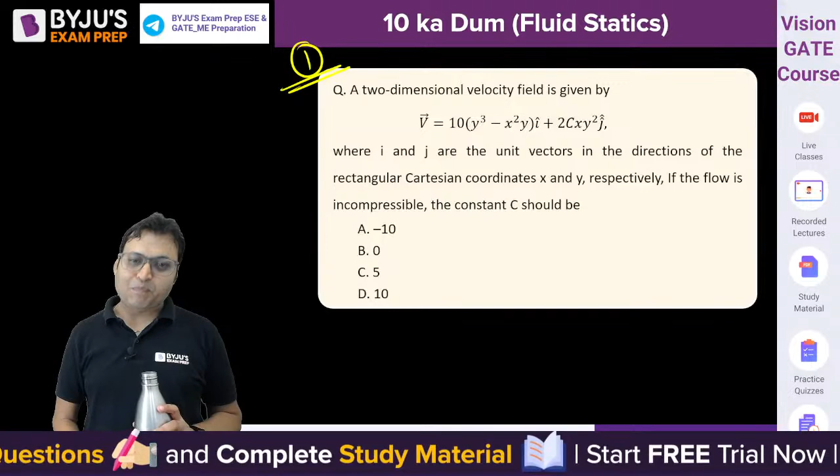Let us start with question number 1. Everyone, please give it a try and let me know the answer. Let me see who will be the first one to give me the correct answer, and I will plan some surprise gift for the one whose performance is consistent and whose time management is perfect.

The question says a two-dimensional velocity field is given by this expression. It is two-dimensional flow, that is why there are i component and j component, where i and j are the unit vectors in the direction of rectangular Cartesian coordinates x and y respectively.

If the flow is incompressible, what we are supposed to find is the value of the constant. What we need to do is apply the continuity equation for incompressible flow.

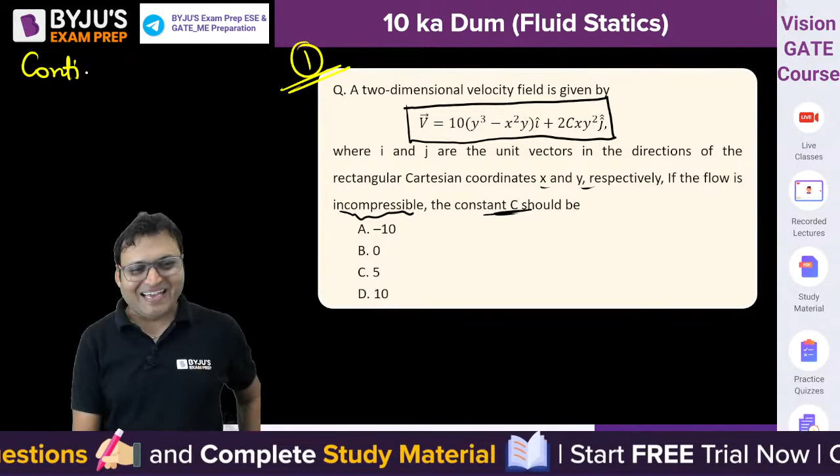Do you guys remember? Yes, Ludwig Prandtl. Oh my God, Prandtl is also there. Ludwig Prandtl is famous for... can you tell me? What has he done in engineering?

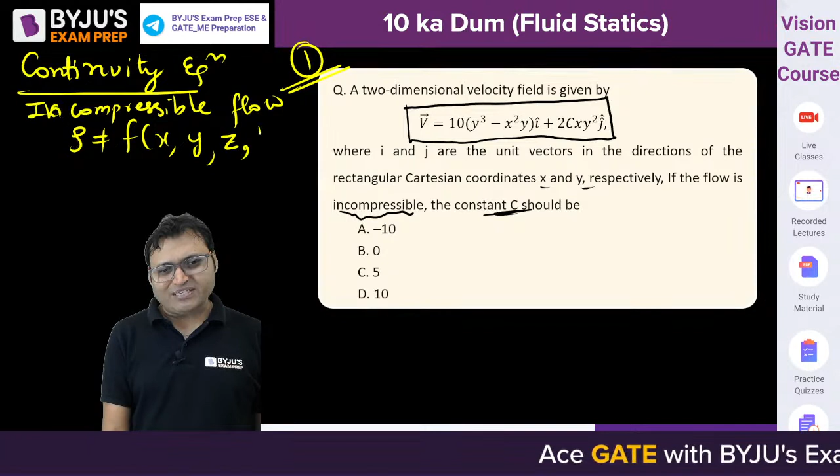If we apply the continuity equation for incompressible flow, what is the meaning of incompressible flow? Density is neither a function of x, nor y, nor z, nor time. Density remains constant throughout the flow. So first of all, you need to equate this expression with the general velocity profile so you can get u and v.

We can get u and v. Thanks for your love and affection. Let me know - theory of boundary layer. Well done, yes, C is the right answer. Ludwig had given the correct answer first, so the prize for this question goes to Prandtl.

Manike, you were a bit late. Yes, definitely the correct answer is option C. Let me quickly solve it for those who were not able to solve it.

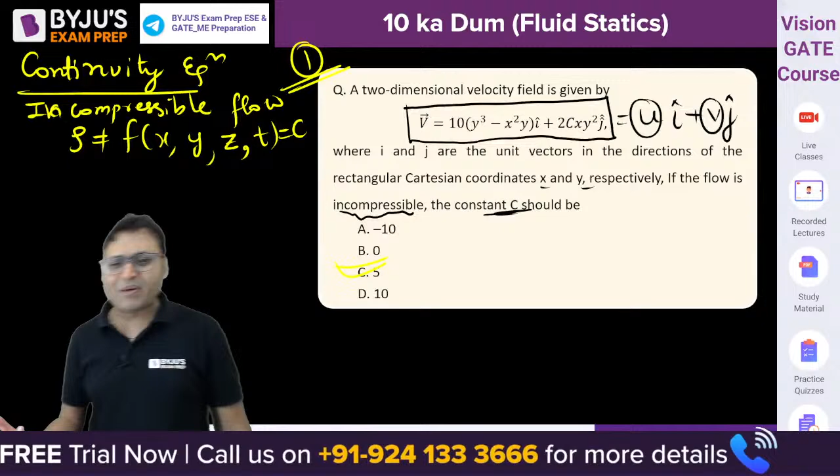So u is equal to the parameter related with i cap, so u is equal to 10y cube minus x square y. And what is velocity in the y direction? That is 2cxy square. So what is the continuity equation for two-dimensional incompressible flow in the Cartesian coordinate system?

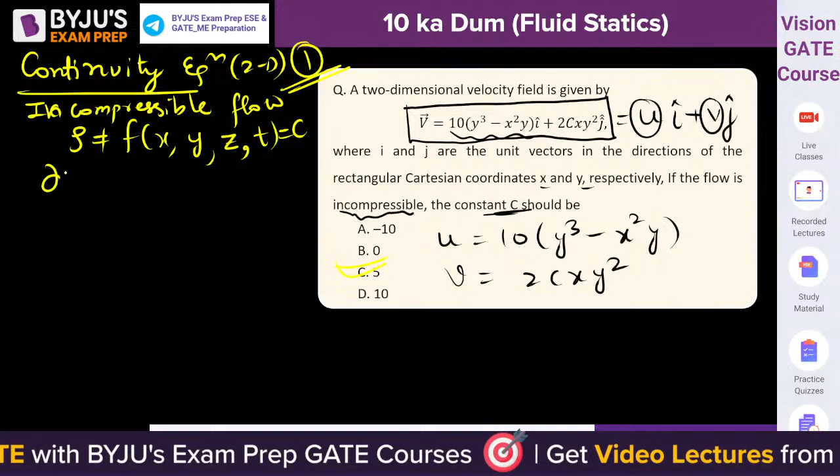We can say del u by del x plus del v by del y is equal to 0. What is del u by del x? If you differentiate u with respect to x, then it will be 10 minus 2x into y. Plus, what is del v by del y? Del v by del y is 2cx into 2y, which must be equal to 0.

So it will be minus 20xy plus 4cxy is equal to 0, or we can say 4cxy is equal to 20xy. Y gets cancelled out, x also gets cancelled out, then c is equal to 20 by 4, that is equal to 5. So 5 will be the correct answer. Well done guys, well done.

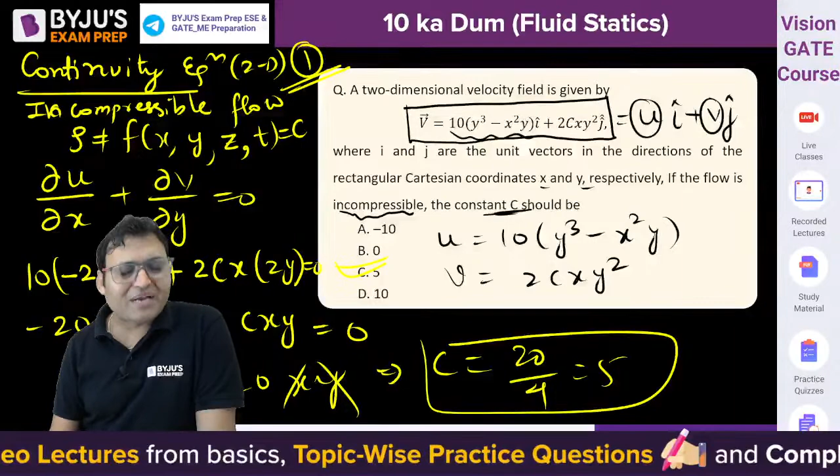Those who were not able to solve it, I hope you understood the concept. The continuity equation for incompressible flow is a very important expression; directly or indirectly, questions are framed around it. Sometimes they ask you to check whether a particular flow is compressible or incompressible. There are two methods to know this: if the density varies with space or time or both, then it is definitely compressible flow, but if the density does not vary with space and time, then the flow will be incompressible.

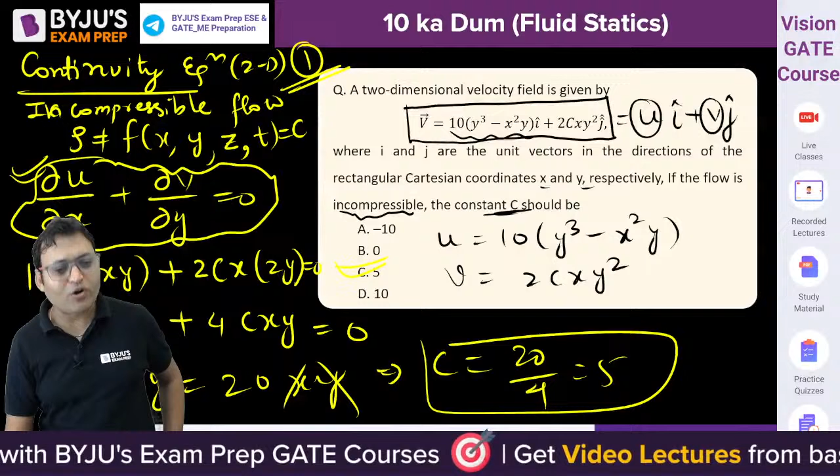If nothing is given regarding density in the question, we need to check the continuity equation for incompressible flow. This is satisfied because the continuity equation represents mass conservation, and for a flow to be possible, mass conservation should always be satisfied. If the continuity equation for incompressible flow is satisfied, the flow is definitely incompressible.

If it is not getting satisfied, then the flow is said to be compressible. All right, let us move to the next question. This is question number 2. I could not type this equation, so I have brought the direct screenshot of the question.

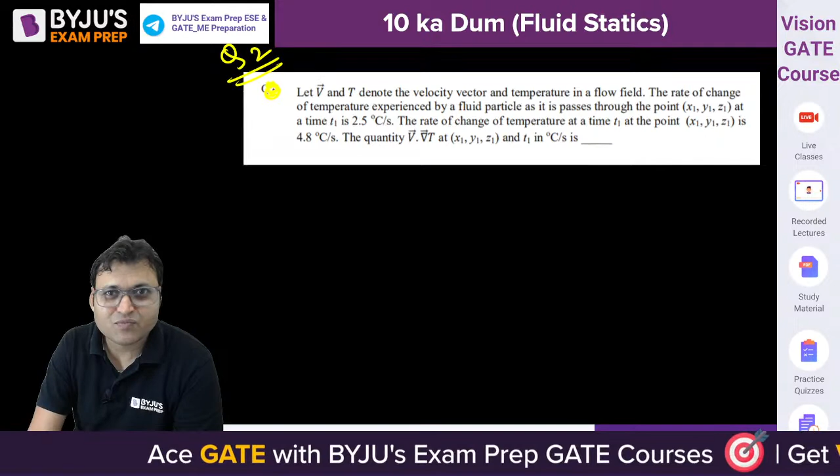One point for the right guess. So wherever you find an option to practice, do not skip that. Always try to keep practicing. The more you practice, even if you are not very comfortable with the theory concept, once you start practicing numericals based on a particular concept, you will automatically start enjoying it and developing confidence in that concept. GATE is all about the application of the concept that comes from the theory.

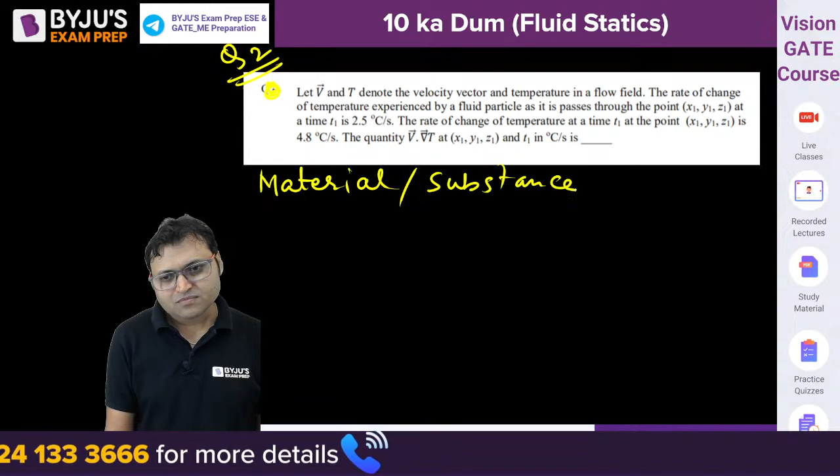Yes, that is correct, Prantal. The question is from the material or substance derivative, also called total derivative.

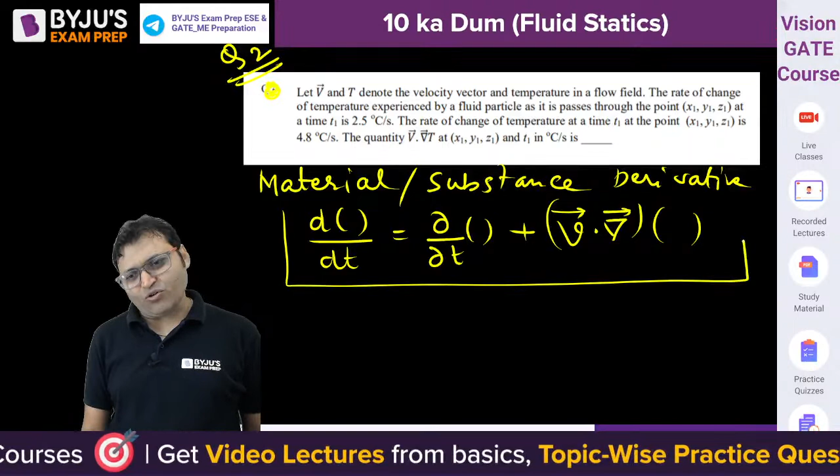The total derivative of any parameter, d by dt, is equal to the partial derivative of that parameter plus V dot del into that parameter. This is called the total derivative of a parameter, or we can call it material derivative. So if we find the material derivative of velocity, that gives the acceleration.

Similarly, we can find the material derivative of temperature, where small t is time and capital T is temperature. We can also find the material derivative of pressure. If we simplify this, we get dT by dt equals del T by del t, the partial derivative, which is called the local or unsteady part, plus V dot del into T, which is called the convective or advective part. Here velocity and temperature are denoted as V and T.

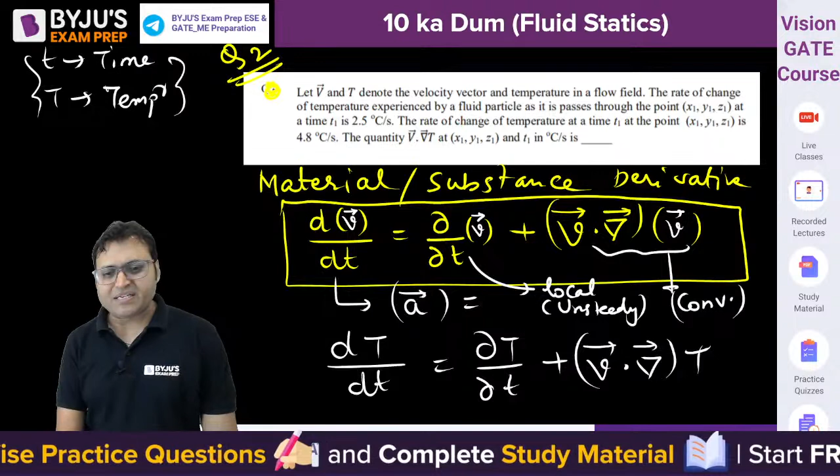So the total derivative, the rate of change of temperature experienced by the fluid particle as it passes through the point, is given as 2.5 degrees Celsius per second. So dT by dt equals 2.5 degrees Celsius per second. The rate of change of temperature at time t1 at point x1, y1, z1, that is the partial derivative of T, is 4.8 degrees Celsius per second.

So if we simplify this, putting these values in: the total derivative 2.5 is equal to the partial derivative 4.8 plus V dot del into T. So V dot del into T equals 2.5 minus 4.8, which gives minus 2.3 degrees Celsius per second.

Minus 2.3 will be the correct answer. Prantal, well done. Maniket, what about others? It should be minus 2.3 degrees Celsius per second. Is this clear to everyone?

Yes Prandtl, yes, this equation is valid for both. Shall we proceed to the next question? This is how you can find out the expression of acceleration.

dT by dt is equal to del T by del t plus, can I say, u into del by del x plus v into del by del y plus w into del by del z multiplied by T. So can I say, if we take T inside the bracket, then it will be u into del T by del x, del T by del y, del T by del z. This is the expression for total derivative of temperature with time.

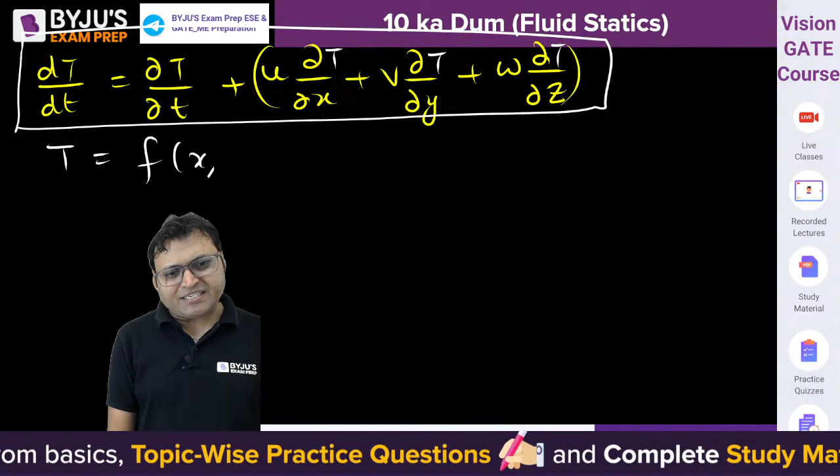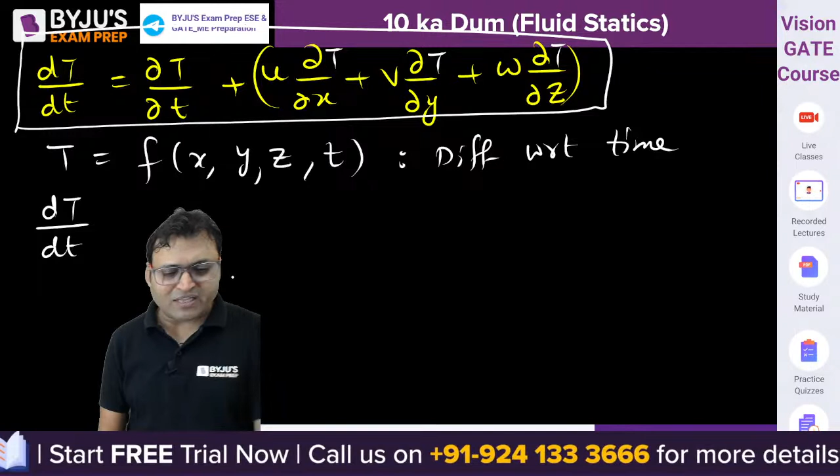That expression can be obtained like this also. As temperature is a function of x, y, z and t, if we differentiate this with respect to time, left hand side is a single parameter, so total derivative with time is on the left hand side. What is the right hand side?

We can say del t by del x into dx by dt plus del t by del y, partial derivative, into dy by dt plus del t by del z into dz by dt plus del t by del t into dt by dt, isn't it?

This will be the expression. Do you get it? And what is dx by dt? That is u. And what is dy by dt? That is v. dz by dt is w, dt dt getting cancelled out. So dt by dt is equal to, that is another way of getting the same expression.

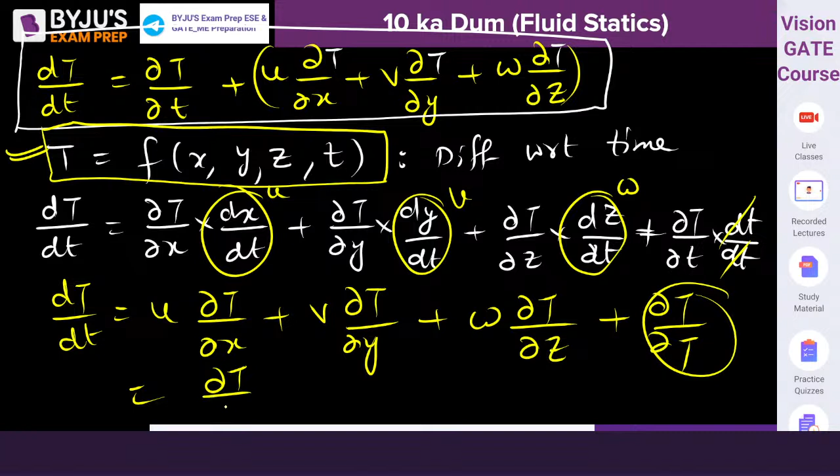So u into del t by del x plus v into del t by del y. If you do not remember the material derivative, then also you can develop the expression by assuming that temperature is a function of space as well as time, isn't it? Plus w into del t by del z plus del t by del t. So that is nothing but del t by del t can be written here, del t by del t, plus

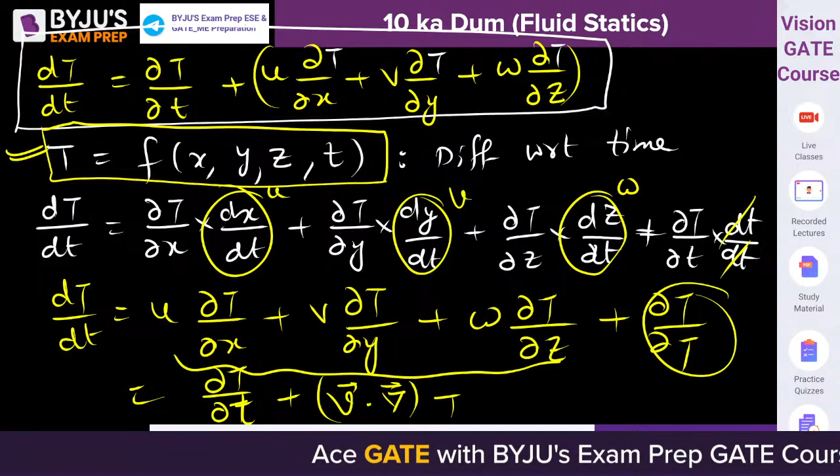this is nothing but v dot del into temperature, isn't it? So that is another way. That is how it is related.

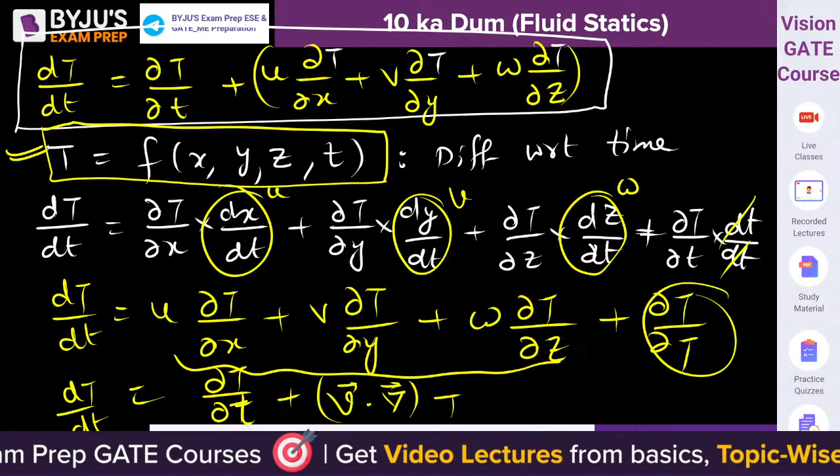Let us move to the next one, question number 3. Shall we proceed to question number 3? This is your question number 3. Everyone, please give it a try. And if you are not able to solve it here, then try the question at home again.

Yes, give it a try and let me know the answer. Ludwig is every time giving me the correct answer.

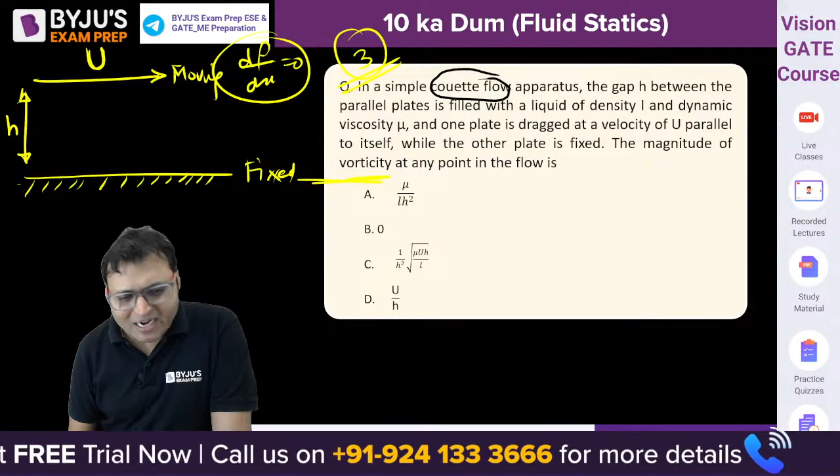The magnitude of vorticity at a point in the flow is. Can you let me know the velocity profile? If we assume it as plane Couette flow, can you let me know the velocity profile? The options are: option A is mu upon rho H square, option B is 0, option C and option D is U by H.

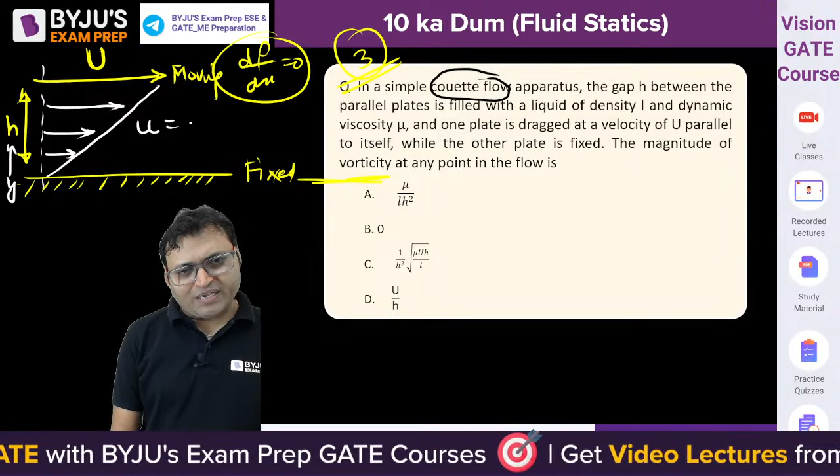Can we assume the velocity profile to be linear? If nothing is given regarding the velocity profile in the fluid, can we say small u, this is y, so u is equal to capital U into y by h. Can we assume the velocity profile to be linear? U is equal to capital U y by h, isn't it? Now what is the vorticity about the z axis? Nobody has given me the answer yet. No one has given me the correct answer yet.

Prantal, कुछ confusion है? So it is a function of y. Can we say u is not a function of x? It is not a function of x, but yes, it varies in y. U is equal to 0 at y is equal to 0. At y is equal to h, U is equal to capital U.

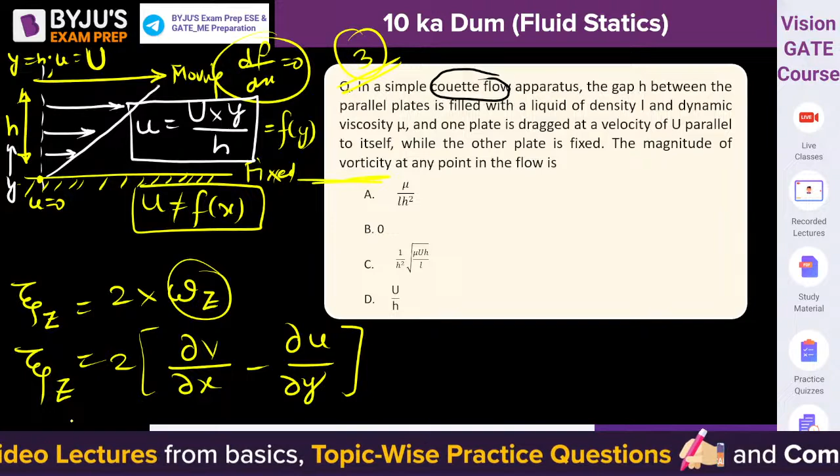It is linearly varying. So vorticity about the z axis is twice of omega about the z axis. And what is omega z? Twice of omega z is del v by del x minus del u by del y. So it will be del v, then del u. That is the vorticity about the z axis. So can we say v is the velocity in the y direction? V is equal to 0.

Velocity in the y direction will be 0, but velocity in the x direction is a function of y. It is only velocity in the x direction. There is no velocity normal to the x direction. So del v by del x will be 0 because v is equal to 0. So del v by del x is equal to 2 into, what is minus del u by del y? Del u by del y is U by h. So minus capital U by h, isn't it?

Sorry, twice of angular velocity, and angular velocity will be, what is angular velocity? Angular velocity is half of del v by del x minus del u by del y. So it is half of 2 into 1 by 2 into minus U by h. So minus U by h will be the value of vorticity about the z axis.

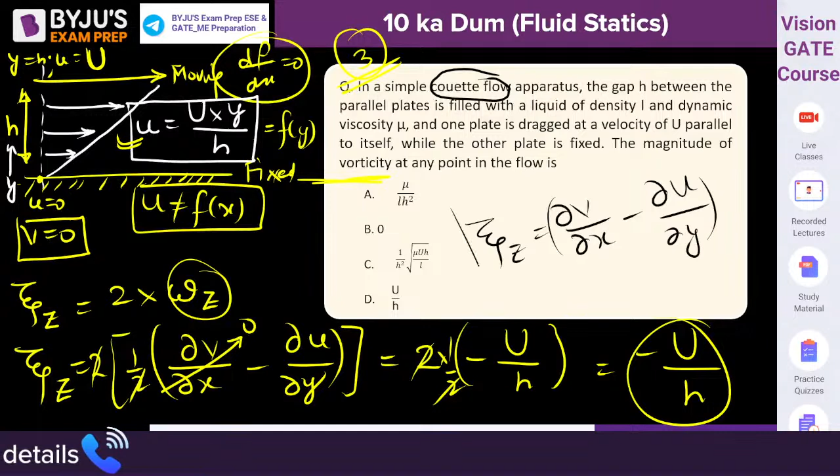Is this all clear? Question number 3. Anybody having any doubt? Do let me know.

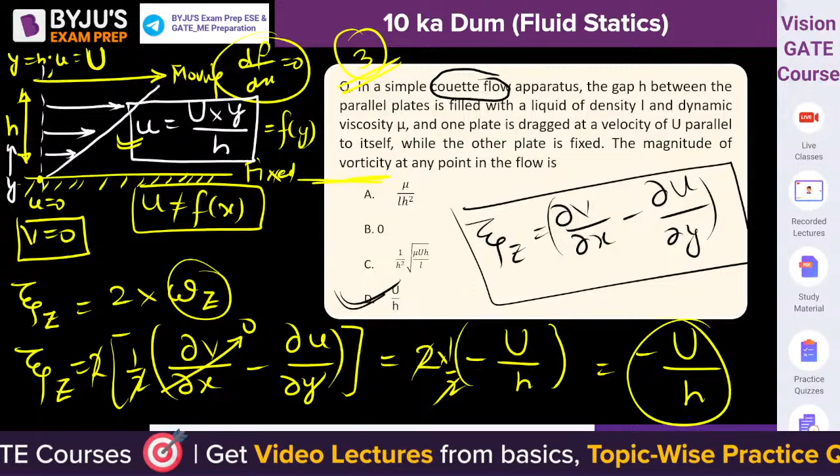Let us move to the next question. Before moving to the next question, let me give you an important information. This is already over, the 14th, the first mega mock test is already over. Tomorrow,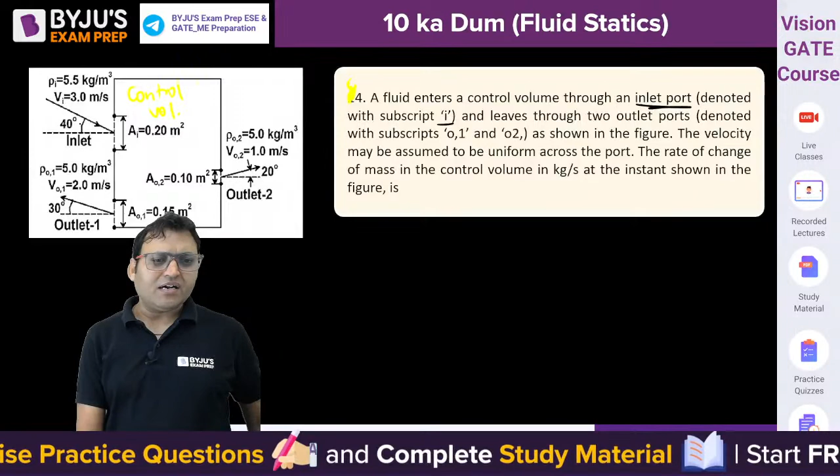So let me help you. If fluid enters into the control volume, this is the control volume. The fluid is entering into the control volume at section, let us say, at the inlet port, which is denoted by subscript I. The fluid is entering at I. The velocity at inlet I is 3 meter per second. The density is 5.5 and the inlet area is equal to 0.2.

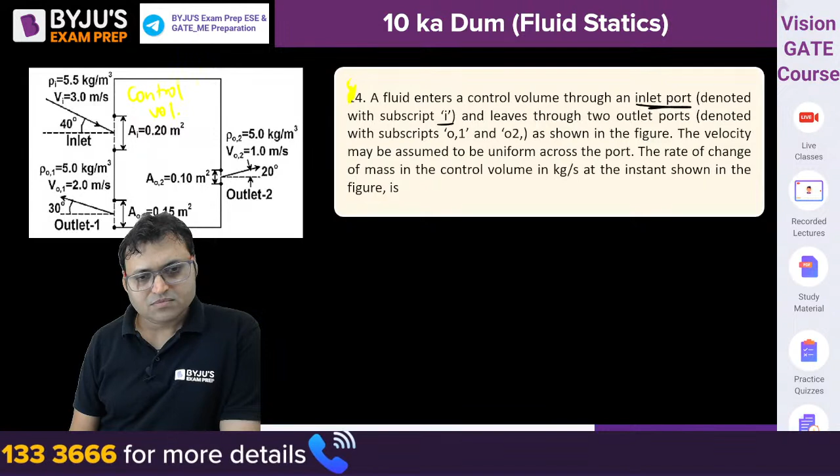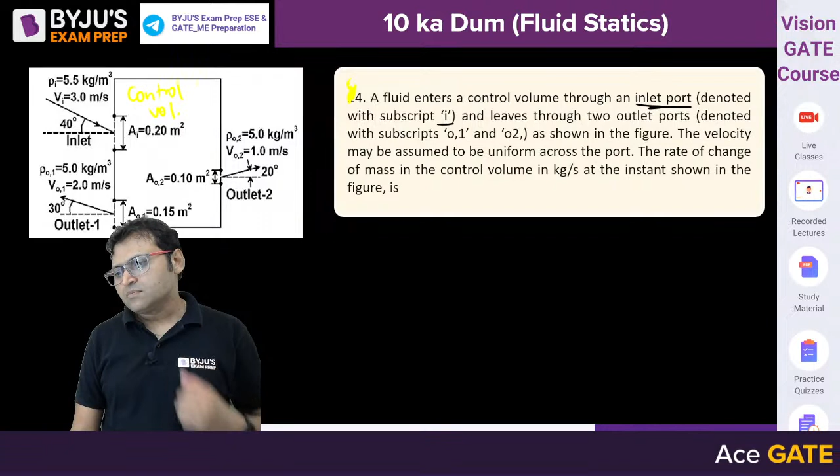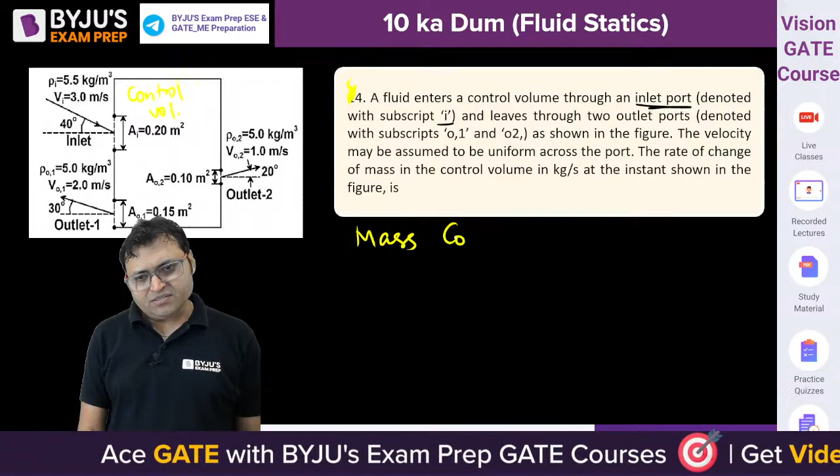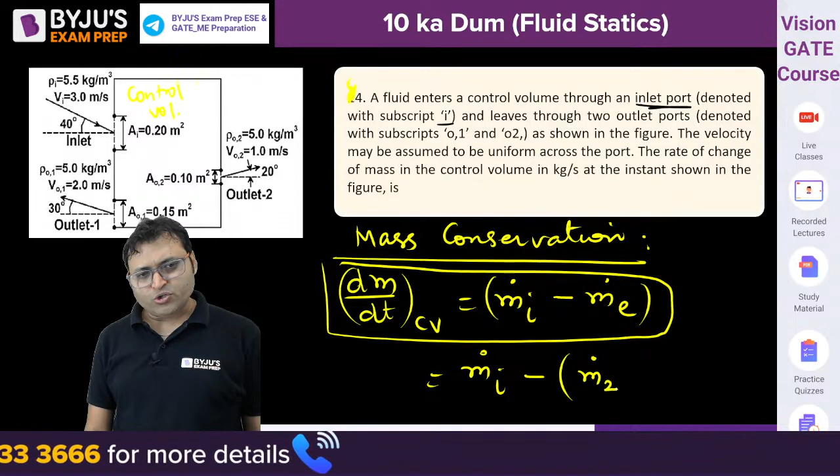So can we say, from the conservation of mass, rate of change of mass in the control volume is equal to mass flow rate entering into the control volume minus mass flow rate leaving from the control volume. That is the rate of change of mass in the control volume. Mass flow rate entering minus mass flow rate leaving, and the leaving ports are O1 and O2. So mass flow rate entering is m dot I at the inlet port, minus m dot 1 plus m dot 2 at outlet. That is dm by dt in the control volume.

So what is the mass flow rate? How to write the mass flow rate? Is mass flow rate a scalar or a vector quantity? It is rho into A into V, or we can call it rho into Q. Mass flow rate is rho into A into V. Will the mass flow rate be a scalar quantity or a vector quantity? Density is given, velocity is given, area is given. Here A into V, or discharge Q equals A into V, and area and velocity must be perpendicular to each other.

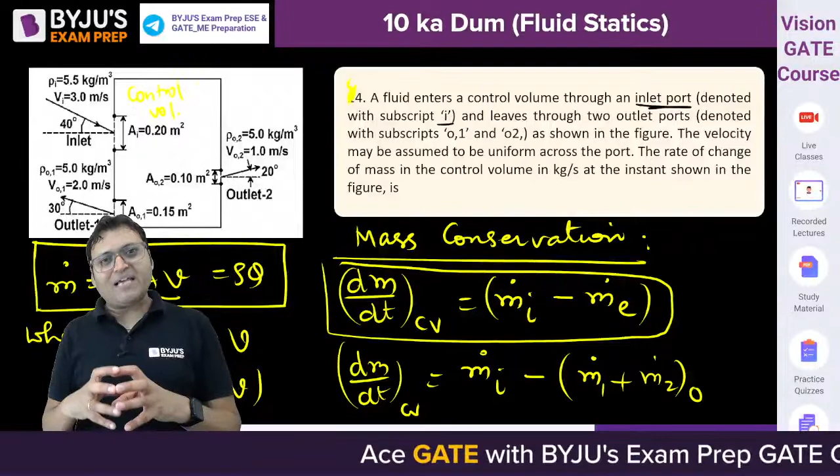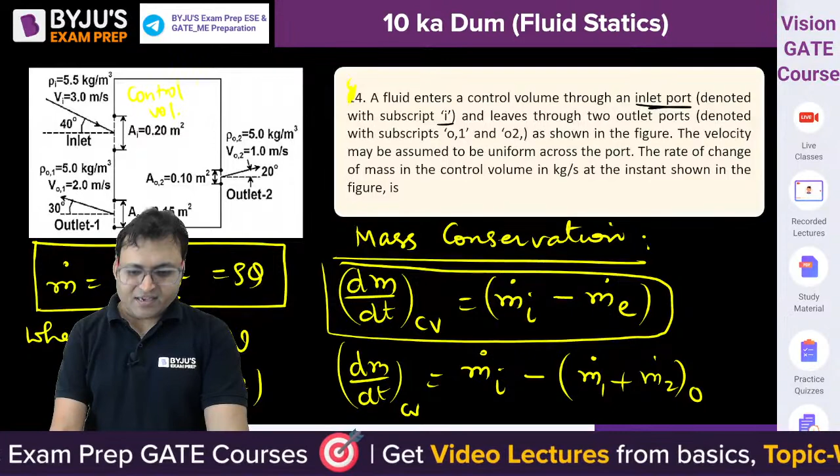So here velocity is having this direction and area is this. If we want velocity and area perpendicular to each other, then vi will be 3 cos 40. Area and velocity must be perpendicular to each other. Mass flow rate is not a vector quantity. Mass flow rate is a scalar quantity, but area and velocity must be perpendicular to each other.

So rho I is 5.5 into area, that is 0.2, into 3 cos 40, that is mass flow rate entering, minus what is the mass flow rate leaving? There are two points where it is leaving. Density is 5 into area is 0.15 into 2 cos 30, plus the third point O2, density is 5 into area will be 0.1 into velocity. Velocity is making an angle of 20 degrees with the area, and area and velocity must be perpendicular to each other, so it will be velocity 1 cos 20.

So this will give you the answer. Can you quickly solve it? 5.5 into 0.2 into 3, 5.5 into 0.2 into 3, 5.5 into 0.2 into 3 into 3 cos 40,

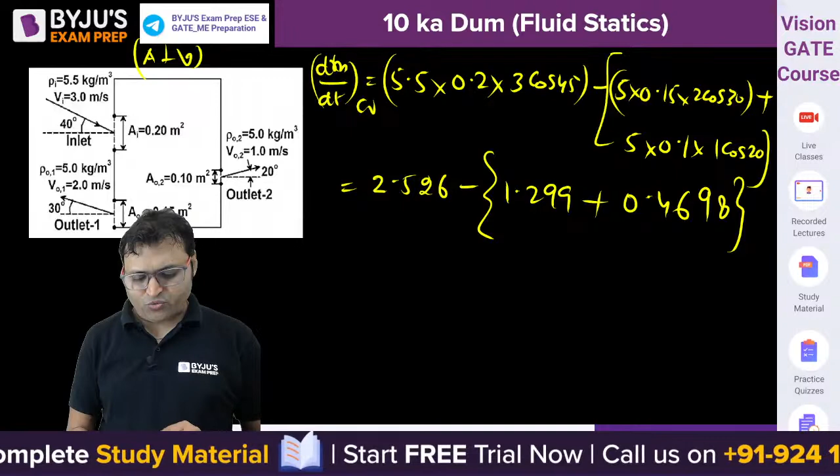plus 1.299, 1.299 minus 2.526, 0.5757, 0.757 kg per second. Do you get it? This should be the answer. 0.757, 0.757 will be the correct answer.

Are you getting it or not? Everybody, please give me yes.

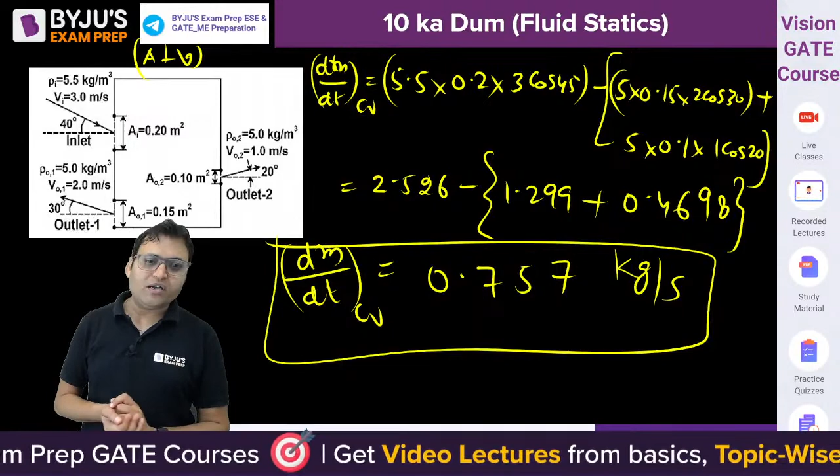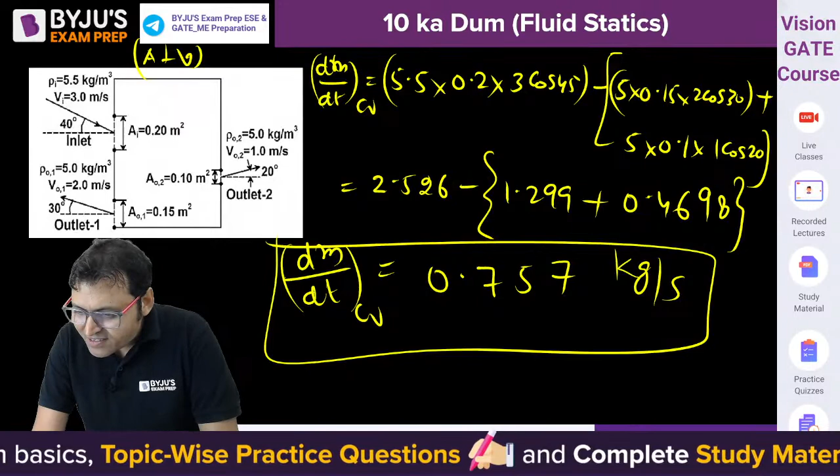Okay, it was added. It should be subtract, in minus out will be the accumulation. So this will be the answer.

Let us move to the next question. Question number 5. Beautiful question again. Question number 5.

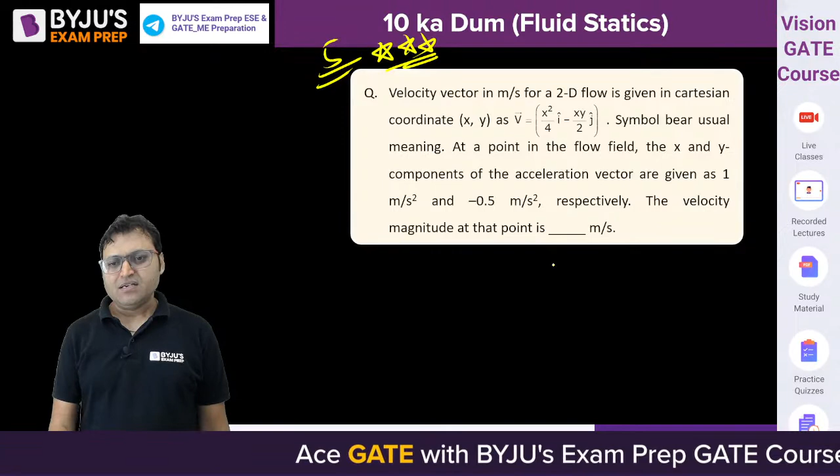Let us move to question number 5 quickly. Velocity vector in meter per second for a 2D flow is given in Cartesian coordinate system as this. Symbols bear usual meaning. X and Y are the coordinates. At a point in the flow, the X and Y components of acceleration vector are given as 1 meter per second square and minus 0.5.

Ax, that is equal to 1, which is equal to u into del u by del x plus v into del u by del y plus del u by del t. Because velocity is not a function of time, so it is a steady flow. Can we say the flow is steady? So local acceleration will be 0. So can you find out?

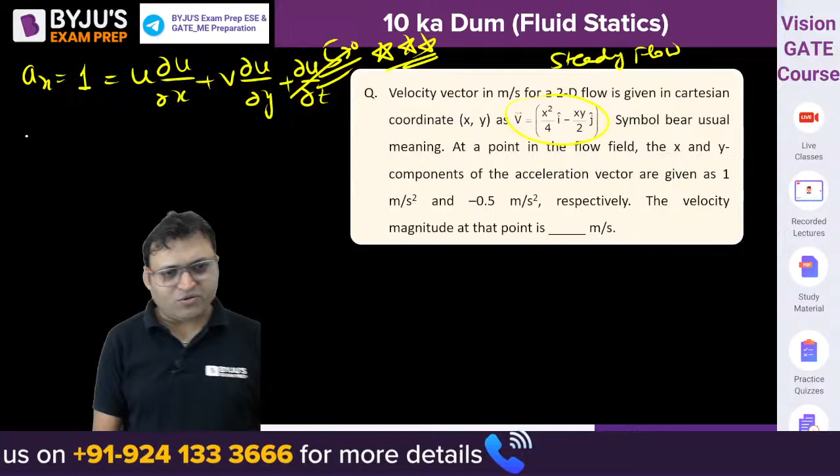Compare this expression with u i cap plus v j cap. So can we say u is equal to x square by 4 and v is equal to minus xy by 2.

So we can say x cube by 8 is equal to 1. So what is the value of x? That will be 2. The point x will be equal to 2, isn't it?

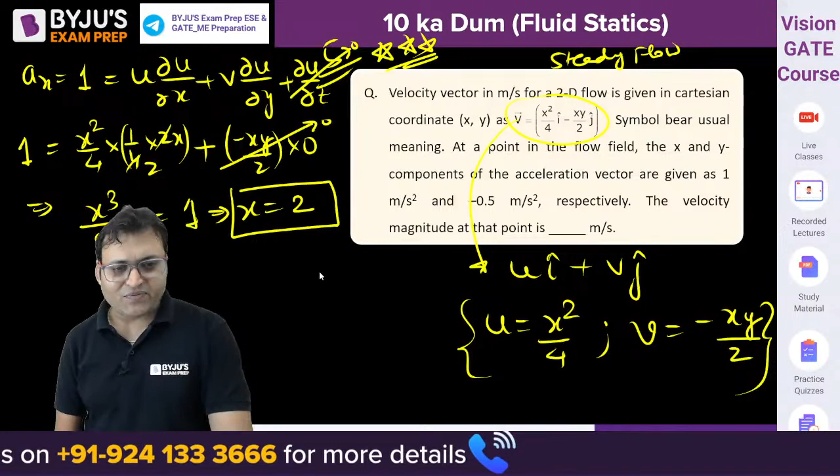Similarly, what is the value of ay? That is minus 0.5 is equal to u into del v by del x plus v into del v by del y. So put the value: minus 0.5 is equal to u, which is x square by 4, into del v by del x minus y by 2, plus v, minus xy by 2, into del v by del y, that is minus x by 2.

What you will get? Minus 0.5 is equal to minus x square y by 8, plus x square y by 4. How much is that? Minus x square y by 8 plus x square y by 4, so it will be minus x square y plus 2x square y upon 8, so it will be x square y by 8, isn't it?

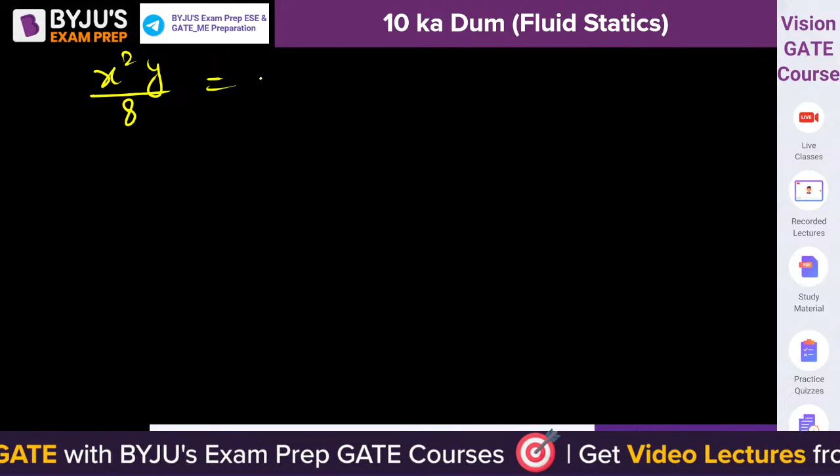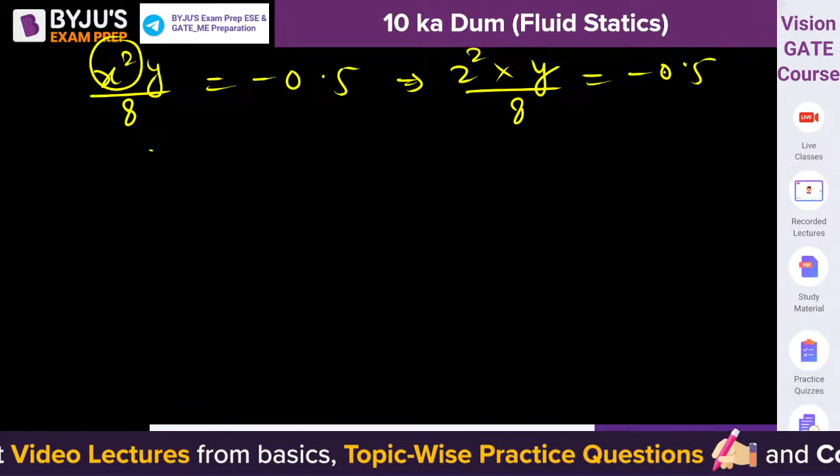X square y by 8 is equal to minus 0.5. Put the value of x, x is equal to 2. So it will be 2 square into y by 8 is equal to minus 0.5. What is the value of y? Y is equal to minus 0.5 into 8 by 4, so it is 0.5 into 2, that is minus 1. Y is equal to minus 1. Are you getting? X is equal to 2 and y is equal to minus 1.

Now we need to find out the velocity magnitude at the point. What is u at x is equal to 2 and y is equal to minus 1? U is equal to x square by 4, that is x square by 4 equal to 1, 2 square by 4, that is 1. U is equal to 1.

And what is v? V is equal to minus xy by 2. Put the value, minus x is 2 into minus 1 by 2, so it will be 1. U is equal to 1 and v is also equal to 1.

So magnitude of velocity is under root of u square plus v square, that is under root of 1 square plus 1 square. Root 2 will be the answer, 1.414 meter per second will be the magnitude.

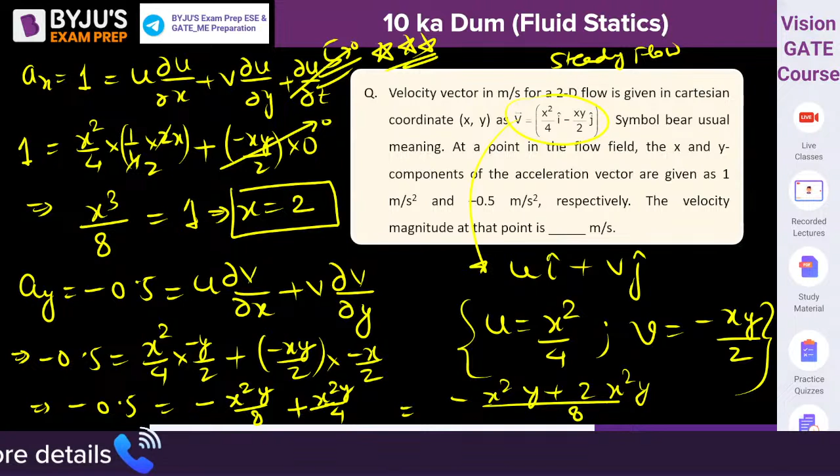Do you guys get it or not? Root 2, either you can say under root of 2, or you can call it as 1.414 meter per second will be the answer.

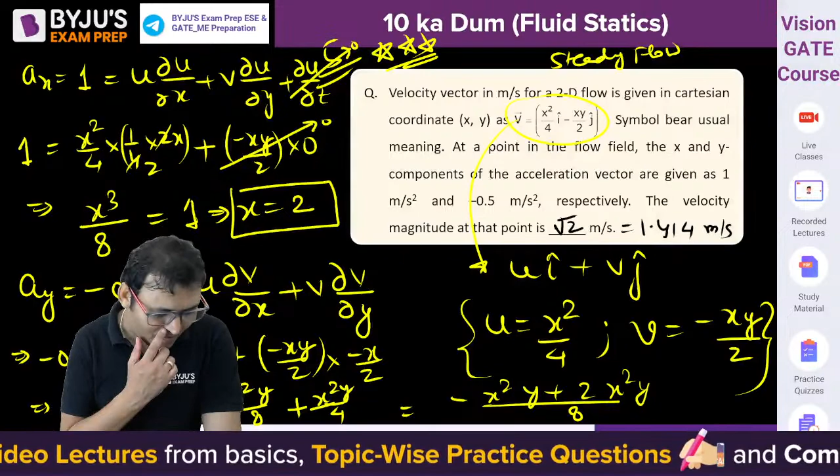Let us move to the next one, question number 6. Beautiful question. The question is actually not about the kinematics, it is more about the differentiation rather than it is about kinematics.

A two-dimensional incompressible flow is defined by this velocity component in meter per second, given by u is equal to minus cy divided by x square plus y square, and v is equal to cx divided by x square plus y square. If the value of the constant c is equal to 0.1 meter square per second, the numerical value of vorticity at a point x is equal to 1 and y is equal to 2 meter is? What will be the vorticity?

First of all, you should know the formula for vorticity about z axis. That is twice of omega z. We can say that is... excuse me, this is the vorticity. Can you let me know?

Can you give it a try? Can you guys give it a try?

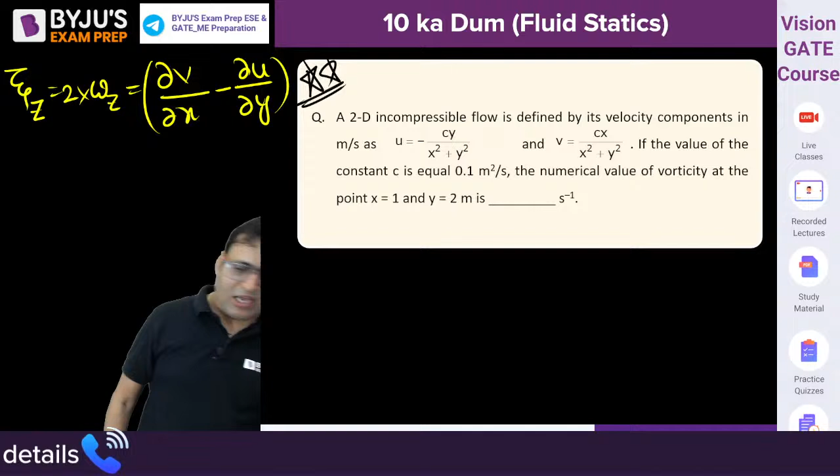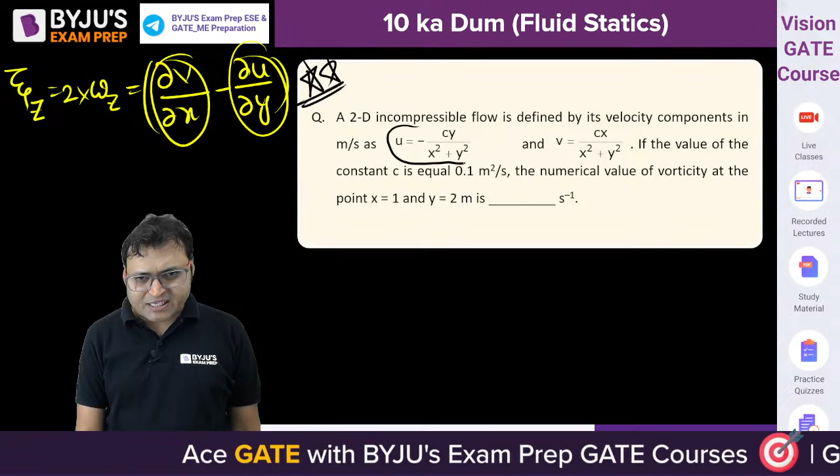Question number 6. Now our objective is to find out del v by del x and del u by del y. Can you find out del u by del y? Look, this is the velocity. U is given by this expression and v is given by this expression. So this is our equation number 1. We will put the value in equation number 1.

So first of all, find out del v by del x. Del v by del x is equal to, c is constant. Then what we will do? C is constant, then we can say...

x into differentiation of x square plus y square to the power minus 1. So it will be minus 1 into x square plus y square to the power minus 2 into then differentiation of x square, that is 2x. This then plus we can say 1 upon x square plus y square is taken constant. Then differentiation of x, that is 1. This will be the expression, isn't it?

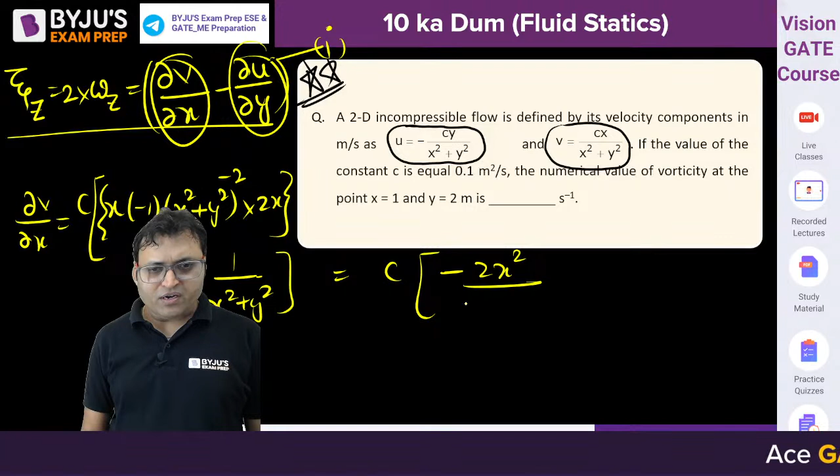Del v by del x. So how much it will be? Del v by del x is equal to c into, it will be minus 2x square upon x square plus y square whole square plus 1 upon x square plus y square.

Or we can write del v by del x is equal to c. If we take x square plus y square whole square as the LCM, then it will be minus 2x square, then it will be plus x square plus y square, isn't it? So it will become minus 2x square plus x square is minus x square. So it will become c multiplied by y square minus x square upon x square plus y square whole square. Please do acknowledge if you are getting this value for del v by del x.

If you guys are getting this value, please do let me know.

Minus 0.4 kaise aaya? Aapne kiya kya? What did you do?

Now similarly, if we talk about del u by del y, u is given by minus cy upon x square plus y square, that is u. So del u by del y, if we want, then we will say minus c.

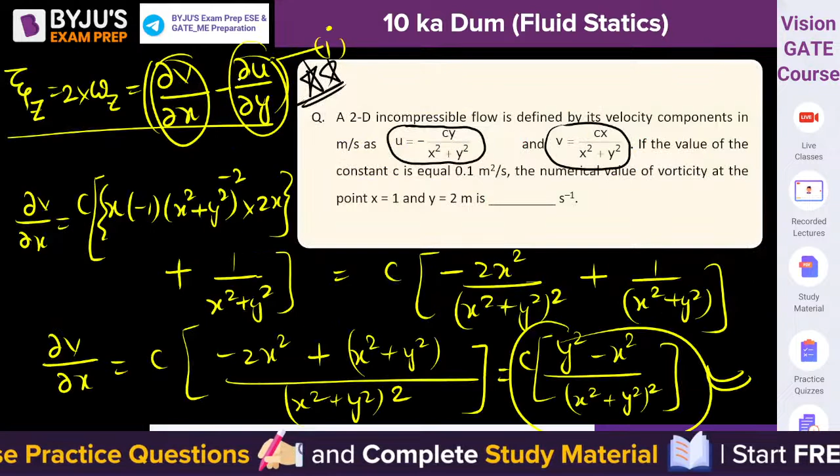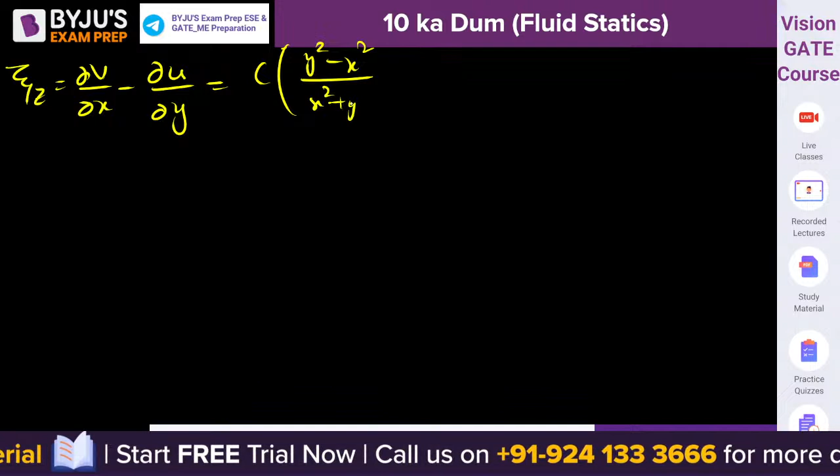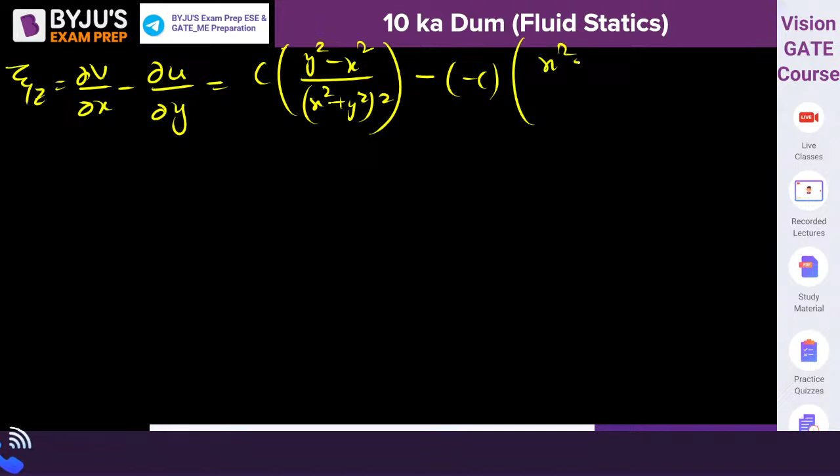Del v by del x is c into y square minus x square upon x square plus y square whole square. Then minus, then it will be minus c into, what is del u by del y, x square minus y square upon x square plus y square whole square. This is the expression.

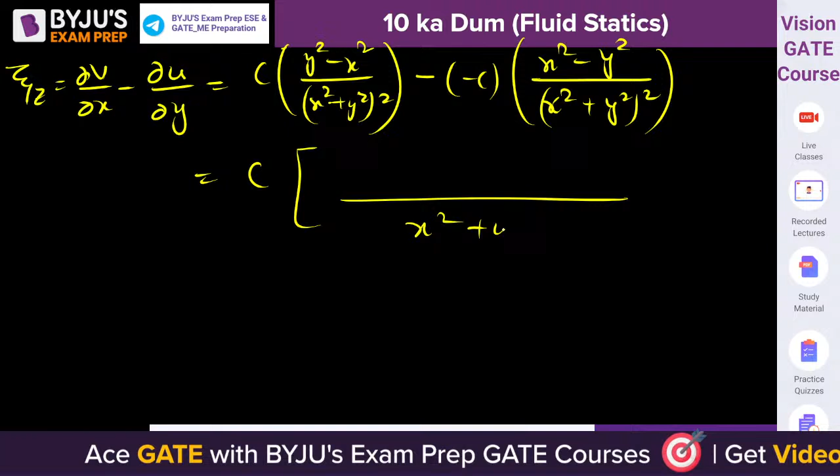So it will be c plus c. So if we take common, then it will become over x square plus y square whole square. Then it will be y square minus x square plus x square minus y square. What is the answer?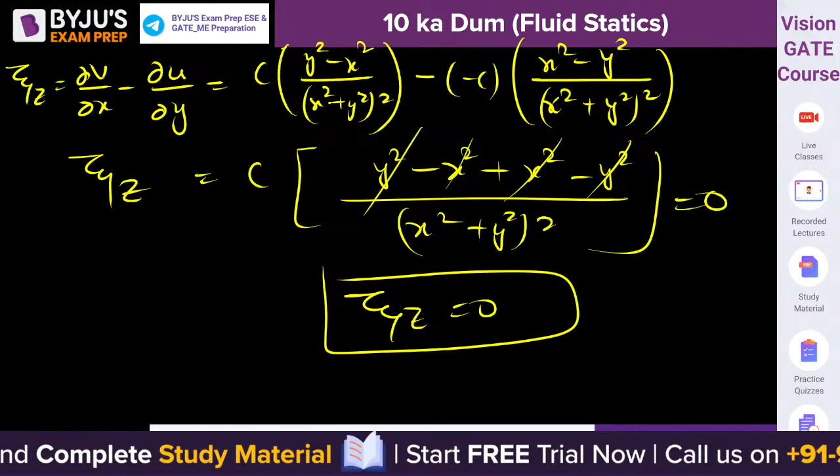Isn't it 0? Are you getting it as 0 or not? Tell me if you have anything to ask. You are most welcome. Why are you guys getting 0.4? My answer is 0, I am getting it as 0.

Any doubt? Everyone, it is an open session, you can raise your concern. You can ask me if you feel any difficulty, if you face any doubt, you can share.

This is a common mistake, but is this correct? I am also not very confident whether this answer is correct or not. With your agreement, if you agree that whatever I have done is correct, then I will feel confident. Is it correct or not?

Prantal, you are performing well, you tell me, is this the right approach? Did I commit any mistake in differentiation? I am also not very comfortable in differentiation and integration because we rarely use it now. But you guys study mathematics, the differentiation. Is the differentiation correct for u and v?

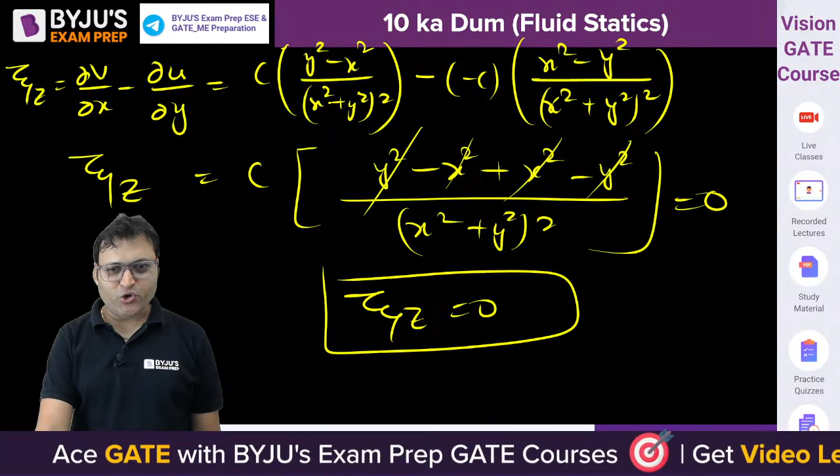Is the differentiation correct or wrong? All right, thank you, let us move to the next one.

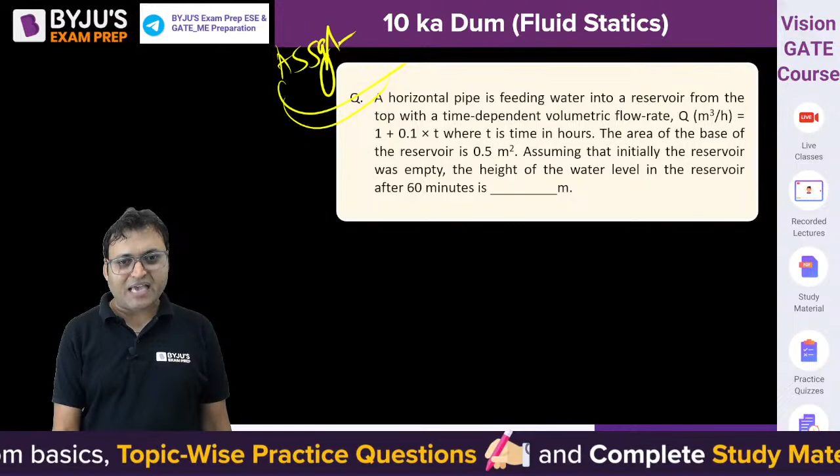Try to solve these questions and bring me your answer. If you have any difficulty or any doubt, you can always discuss with me either through my mail ID or my Telegram channel.

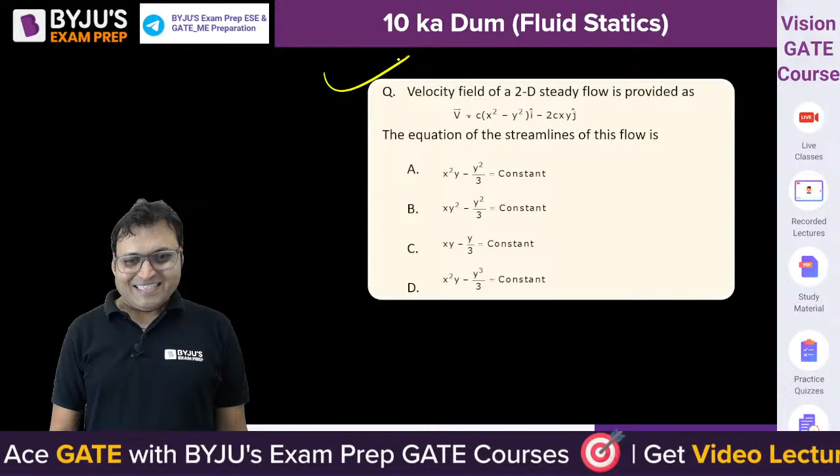Try to solve these questions. This is another assignment, simple questions, but yes, concept clarity is important. These are your assignment questions. Please give them a try and bring me the solution through my Telegram channel, or I will share the PDF of this session, don't worry.